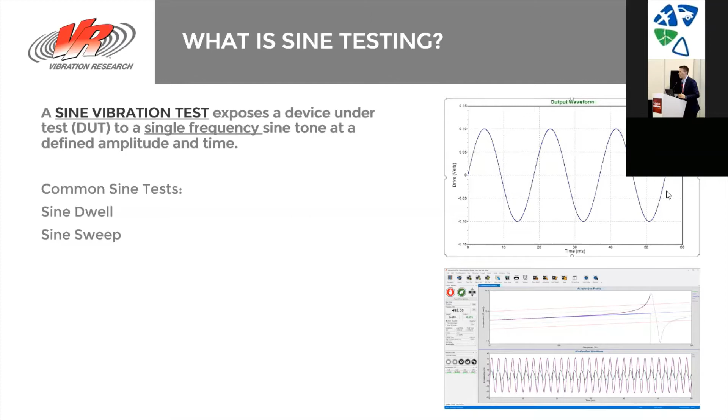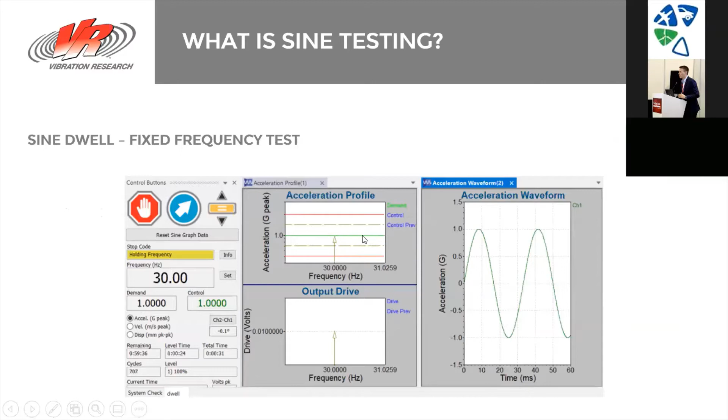Perfect. So as Leonardo explained, the sine dwell is a fixed frequency test. So here we can see we set the test to run at 30 hertz, 1 G, and so we see only one frequency. If this was a sine sweep, we would see this moving here, right? So a single sine wave at 30 hertz.

Now a sine sweep, on the other hand, we're sweeping. So what that means is we're changing frequency as we run. So for example, here, this test is running from 30 hertz up to 1,000 hertz. And the way this is set up is our control channel is channel 1, and we have either 3 different products or 1 product with 3 accelerometers. And those are what we call our response, channel 2, channel 3, channel 4.

So control and channel 1 are on this flat line, right? We've asked the shaker to run at 1 G from 30 hertz to 1,000 hertz. The response, channel 2, channel 3, channel 4, we see several different resonance points here. So channel 3 had a resonance right here somewhere around maybe 150 hertz. We see channel 2 had one up here around, I'm just going to guess, about 500 hertz, right? But what we see is that we're sweeping through, and what that allows us to do is understand the dynamics of our product.

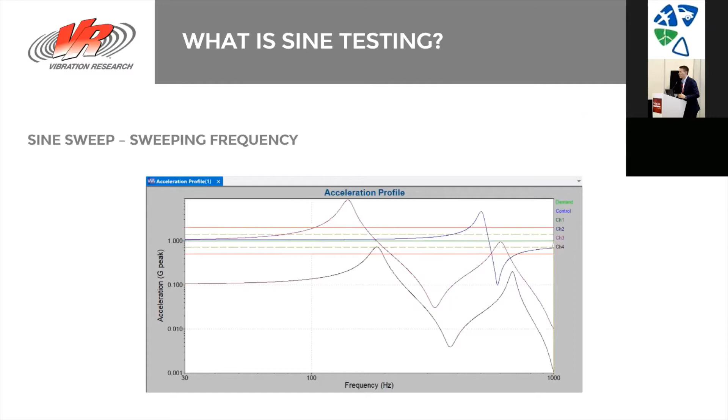So why should I use a sine test? What is the reason that we're doing sine tests? Well, the number one is what I just talked about. It's we can accurately identify resonances of a product. So for example, in this image on the right, we can see that this product has a very sharp resonance. Its first mode resonant point here is at 192.6 hertz, right?

We actually see that there's a big response. I'm not sure what type of product this is, but it's very, very sharp resonance. We have 1 G input with 100 G's output. So it's a very, very sharp resonance. But what it tells us is that if we're designing this product, right, we want to make sure that we're designing the product so that the end use environment does not excite these frequencies here, right?

So for example, maybe the end use for this product is 30 hertz to 100 hertz. In that case, most of the product's life will never experience the resonance, right? So product engineers can do this to better understand their product. Next, this can also be an effective means to bring the product to failure. So what does that mean?

Well, it means that if we define the resonance point, for example here, 192.6 hertz, we can run a test, a sine test, at that frequency, that fixed frequency, and that's going to be the most damaging test to that product, right? Because we're focusing all of the shaker's power right on that resonance. And so we can use that for a pass-fail test, or we can use it for a fatigue test.

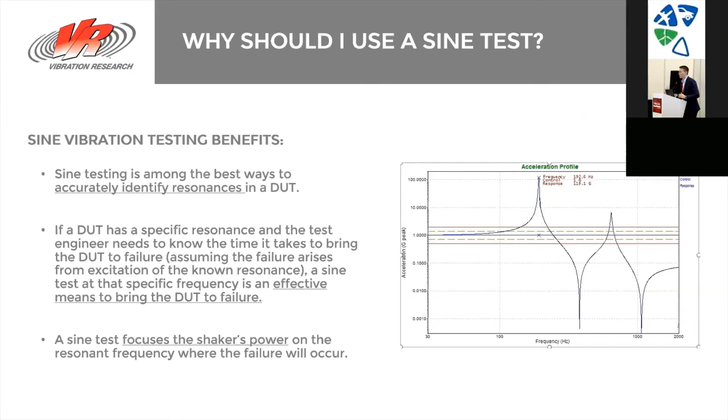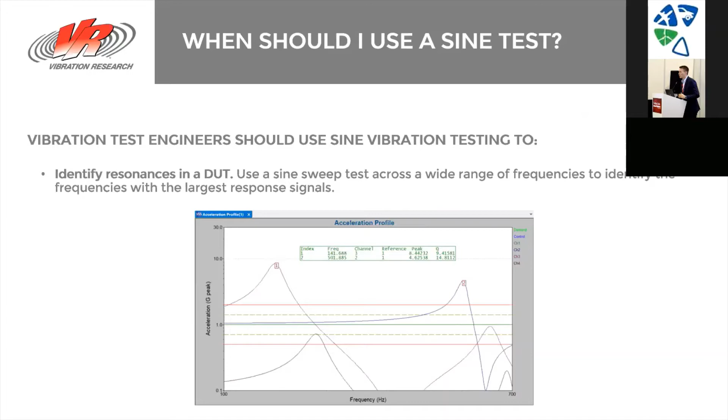Okay, so when should I use the sine test? Obviously here, as we've discussed several times, to identify resonances in a product. That's probably the #1 reason that we use sine, right? We define the response. But we can also use that as well to define or validate our shaker and our fixture. So we can potentially identify problems with our shaker, with our head expander, with our fixture to ensure that it can run the test that we want.

So one very useful tool that people can use in their lab is every year they can run a sine sweep, or they can run a sine sweep with this total harmonic distortion calculation, and they can evaluate how their shaker is reproducing a signal, right? How well is that shaker running at each frequency? Typically, we say if the shaker is above 10% THD, there may be something going wrong, or perhaps the flexures are becoming old. But it's very nice. You can overlay the past years to confirm if something is changing.

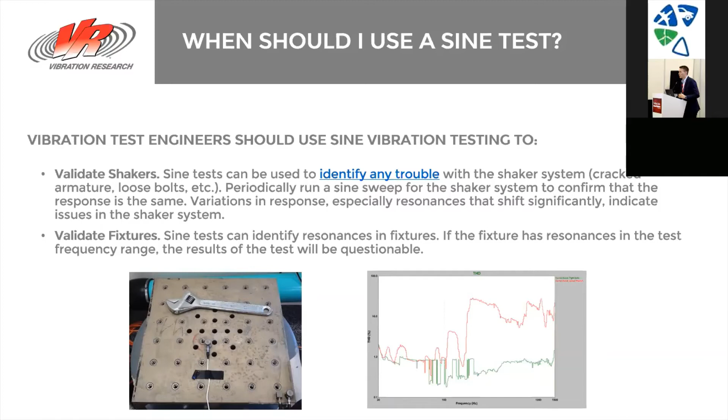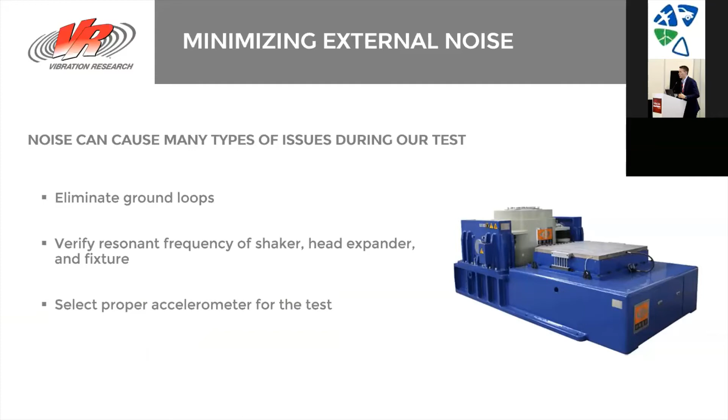So if we look at ground loops, what are ground loops? Well, in a vibration test system, we have to be careful to confirm that there is only one ground point in the system, or else we run the risk of having ground loops. So our controller, our amplifier, our shaker should all be grounded back to a single point.

When we see problems is people have the controller at some distance from the shaker and it's plugged into a different circuit, which means there's a big resistance between the ground points. And what can happen then is that there is current being pulled through your signal cables, and that shows up as noise on your test.

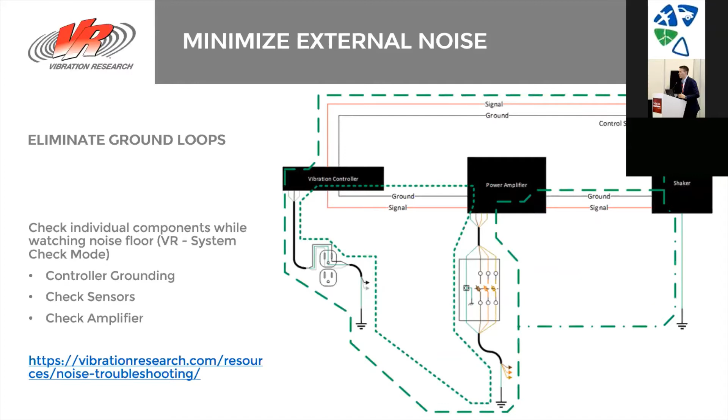Okay, we can verify the resonant frequency of the shaker, head expander, and fixture. And with this section, I would also like to answer Mr. Noriega's question. Mr. Noriega asked, can you give us more details about the test we need to run to validate the shaker or the fixture? So the most basic test we can run is a very simple sine sweep, right? And so we can mount our response accelerometers on the fixture, on the head expander, and we can understand how it responds with a simple sine sweep.

And what we can do is compare that yearly. If you have access to more advanced calculations, like total harmonic distortion, you can use that to even get a better picture of how well the shaker is reproducing the signal that you want.

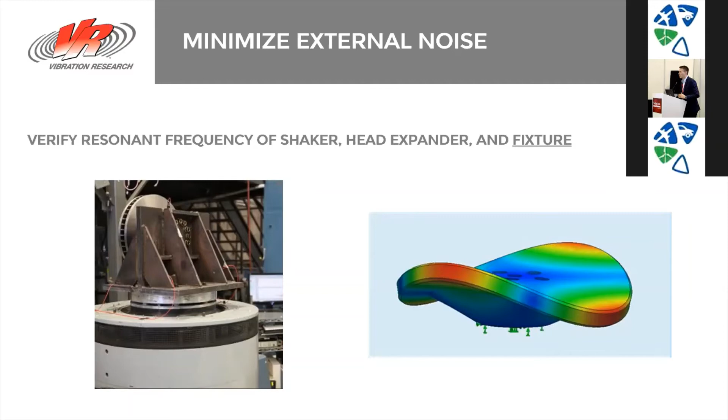Okay, and finally, it's important to select the correct accelerometer for the test, especially when we're running low-level sine tests. So if you're running 0.5 Gs, 1 G, we would recommend that you use a 100 millivolts per G or higher accelerometer. So what that means is 50 G max or less, right? A 10 millivolt per G accelerometer has a max of 500 Gs. A 100 millivolt per G accelerometer has a max of 50.

You can also prevent ground loops by using what's called an isolation base. Now, if you're having problems with a ground loop between the shaker and the controller coming through the inputs, oftentimes this is caused by a ground loop because the accelerometer is getting a ground from the shaker and the ground is not balanced.

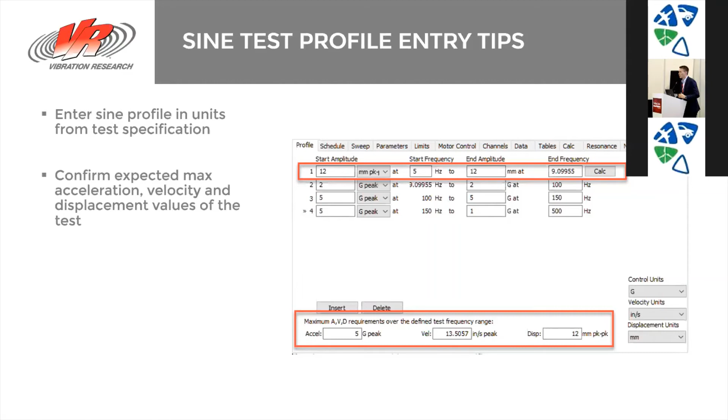Perfect. Okay. And we had a question come in here from Mr. Panchi. He asked if there's any location that we can learn about how to select the correct accelerometer. Is it located in the Shaker manual?

This, I would pass the question to the SITEC team because I know that SITEC is working with the manufacturer Dytran, and Dytran is an accelerometer manufacturer. And I know that they're going to have guides, recommendations. So if you can put in, what is this going to be used for? What is the temperature range? What is the frequency range I need? These types of things, they're going to be able to help you select that accelerometer.

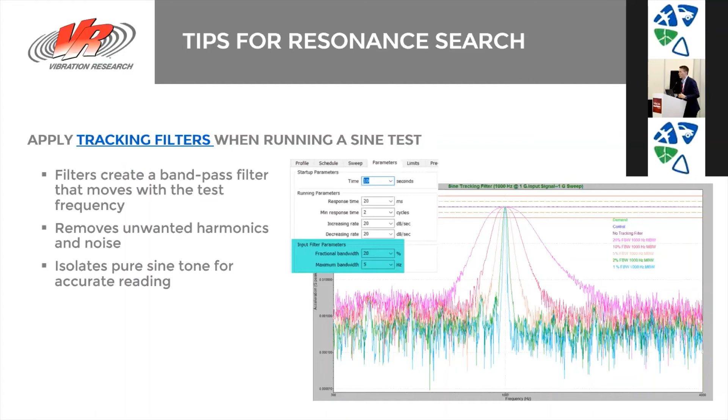Okay, next, tips for resonance dwell. So resonance dwell is when we sit at one frequency. So traditionally, there's a test called sine resonance track dwell. This is where you would run a sine test, find the resonant frequency, and run the test at that frequency. Well, there's a problem with that. The issue is that the resonant frequency changes as a product starts to fatigue, right? So in the real world, if we're trying to do a fatigue test using a dwell, if the product starts to fatigue and the resonant frequency changes, well, it's still being excited at that new frequency, right?

Because in the real world, there are many frequencies being excited at once. In our lab, we're only exciting one at a time during a sine test. So what is the solution? Well, we need to track the resonant peak instead of the frequency.

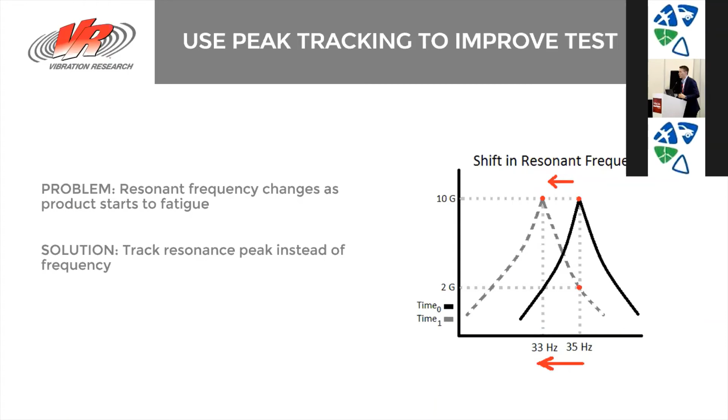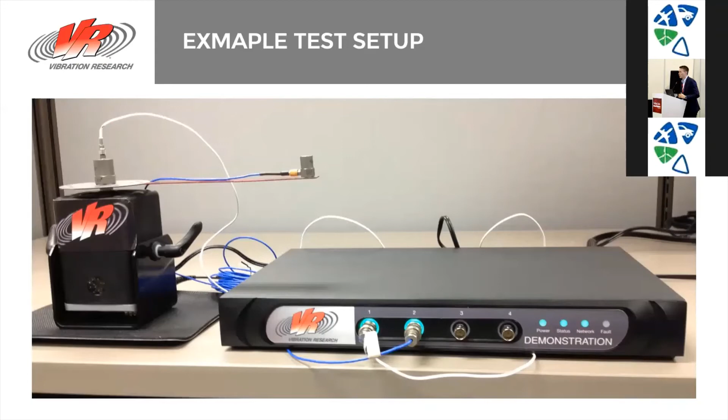So here's an example test setup. This is just a small setup, but an example for you. We have a VR controller with 2 channels, a small shaker. Channel 1 is the control accelerometer mounted in the center of the beam, and channel 2 is the response accelerometer mounted at the end.

But what is the issue with that? What are the potential issues with the traditional method of fixing one frequency? Well, as the product starts to fail, the resonant frequency can change. So if we look at the image on the right, we can see this is our original test, right? We did a sine sweep, and we found here this shape. 35 hertz was the product resonance, right?

So what we did is we set our test to run at 35 hertz, which causes the product to run at, let's say, 10 Gs during the test. That's the response. But the product starts to fatigue, and the resonant frequency shifts from 35 hertz to 33 hertz. If we're still running our original test, now that product is only being excited at 2 Gs instead of 10 Gs. But in the real world, this product would still be excited at the full peak at 33 hertz. So that's the potential issue with this.

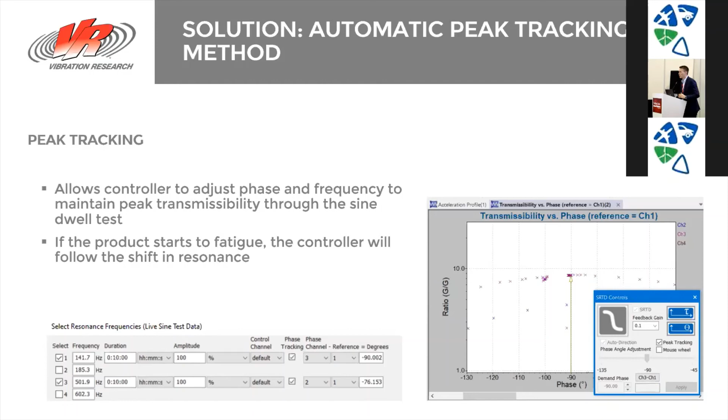And so in a minute, I'll actually open up our software and show you a little bit how we do that. I'll walk through a whole sine test and talk about some of the things that we talked about today. Okay, before I switch to the software, I just wanted to check if there are any more questions about what we talked about.

Roberto asked an interesting question here. He asked, when testing a given structure, is there always an anti-resonance between two resonances in the frequency domain? Put another way, if we see two peaks with no valley in between, will this signal that there's something wrong with the test? In my experience, I have always seen an anti-resonance.

So I would need to pass that question to our PhD and software engineer and see what he has to say. But Roberto, I should get your email, and then I'd be happy to follow up on these two questions for you. I don't know the answer to this one here.

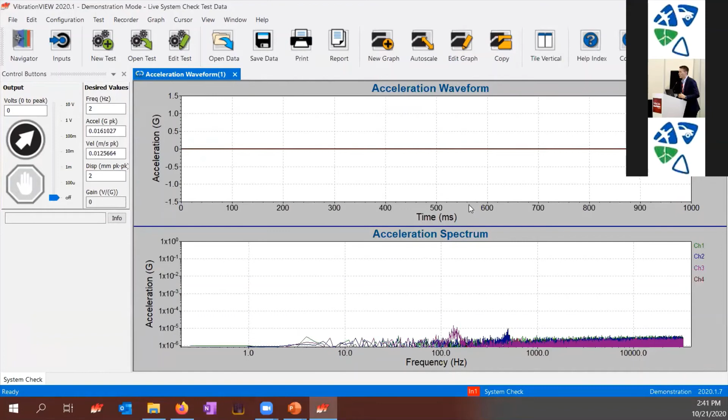Okay, so the first thing I'd like to talk about here is this system check mode. This gives you a live reading of both the frequency and the time domain. If you're doing that ground loop testing, you can come in here, because the ground loop will often show up as 60 hertz noise. So you can readjust the way you have the system grounded and see if you can lower that 60 hertz noise. That's one easy way to troubleshoot.

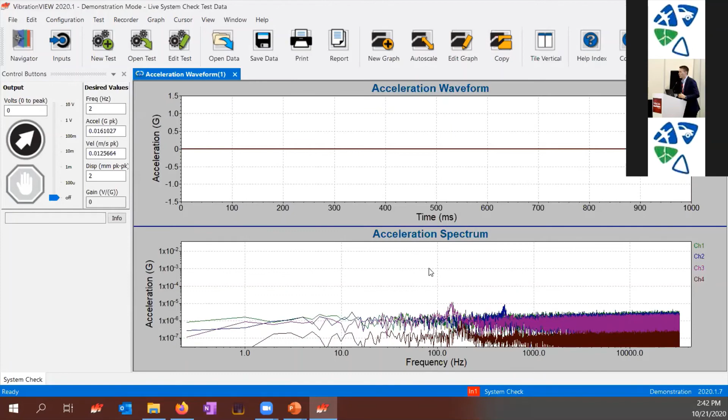Next, let's run a sine test. So I'll start a new test, sine. Actually, in this case, I can run a simple test. We're just going to run from 30 hertz up to 1,000. 1G acceleration is just fine. Now, if you remember what I said about sweep rate, we're going to be more accurate if we lower that value, but we don't want to wait here. So I'm going to increase it just so we don't have to wait.

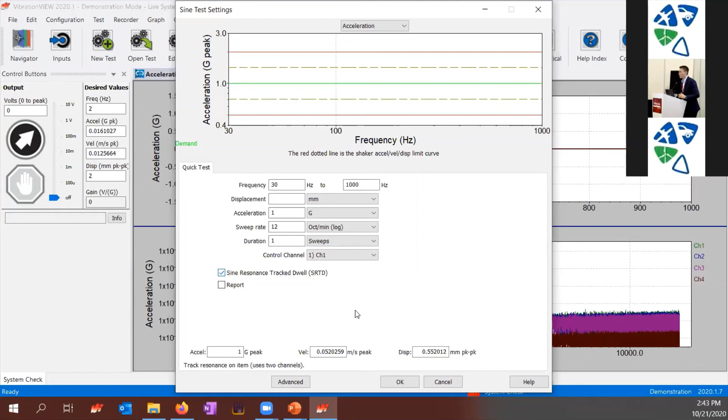We'll do one sweep. My control channel is channel 1. And then I want to turn on this sine resonance tracked dwell option. What this will do is automatically find the resonances and allow us to do that peak tracking mode that we talked about. So I'll click OK. Don't need to save the profile. I'm going to start the test, and let's add a few channels. I'll add channels 1, 2, 3, 4. I don't need the previous sweep.

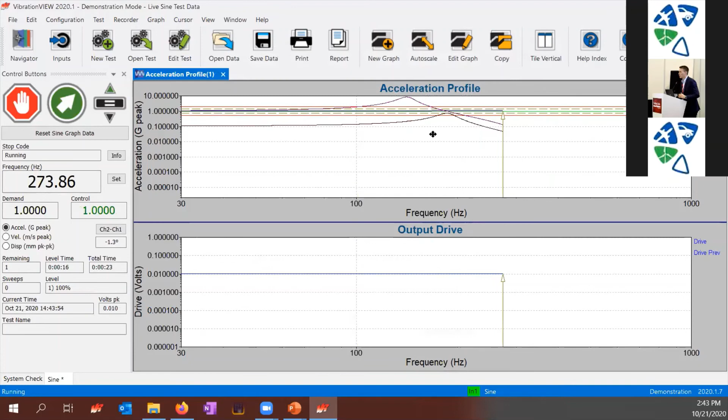So you can see we're sweeping very quickly. We can see a few resonances popping up. One thing to mention is right now I'm running this software in our demonstration mode. One thing that's very nice about VibrationVIEW is that anybody can download this software directly from our website, and you can run all the tests you'd like, all the modules, create profiles, all for free. We use it as a training tool.

So here you'll see it located 5 resonances. It found one at 141.7 hertz and another one at 501.9. In the traditional SRTD test, I would just enter how long I need to run this, maybe 1 hour or 2 hours, depending on the test specification, and I would run, right? But in our case, we want to introduce this phase control, which will allow that tracking we talked about. So I will hit run selected tones.

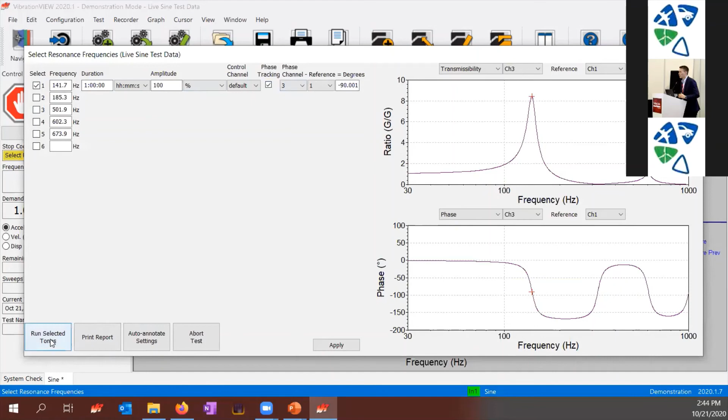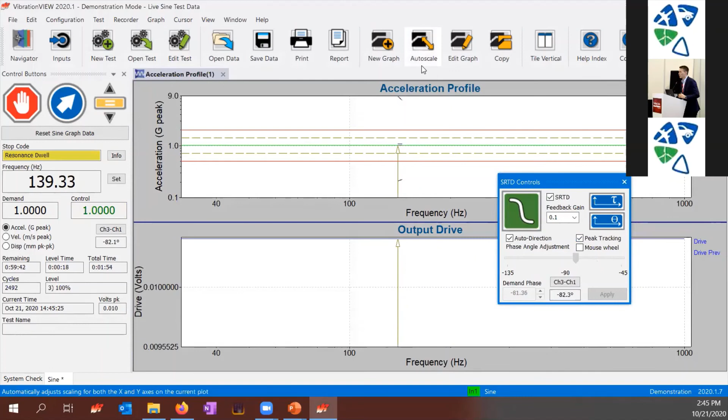Now it's automatically running at 141.69 hertz, what we expected. What it's doing is trying to maintain this phase. But we can also add this peak tracking option, which will automatically adjust to make sure that we maintain the peak. One way we can see that is by looking at this transmissibility graph. So I can add that. We can look at transmissibility, and also transmissibility versus phase, to see how the transmissibility responds as we adjust the phase and the frequency.

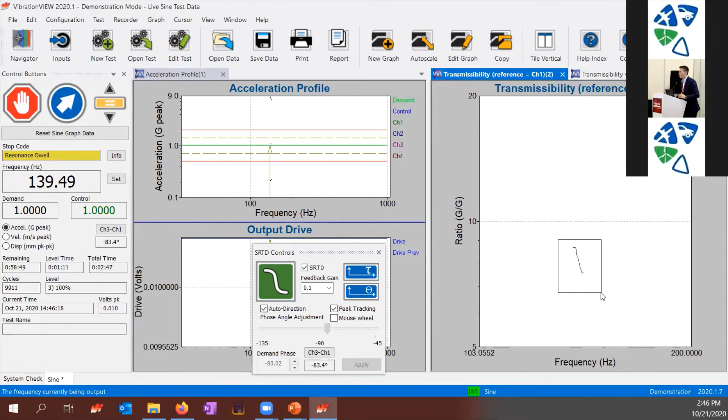So this is the automated mode, and what it's doing is cycling by slightly adjusting the frequency. I'll pull the frequency over here so we can see it. Now the frequency is fixed. Well, there it starts to go, changing little by little as it's finding the peak. We see the phase change, the frequency change, all to try to maintain the peak transmissibility of the test. So if you were running a long duration test and the resonance of your product started to shift, it would follow that. Okay.

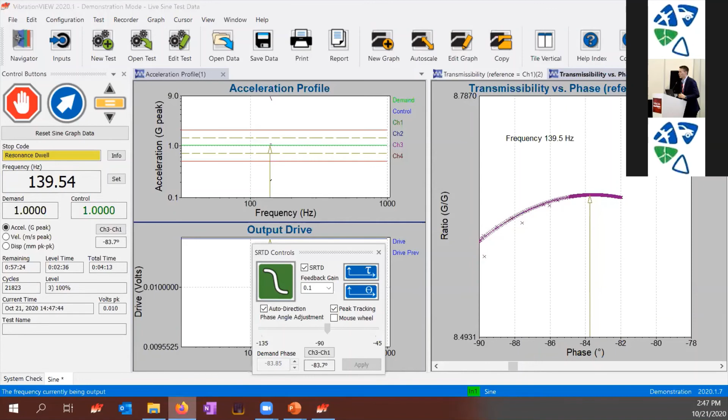Perfect. So in addition to the software, of course, I know that you're all taking this webinar, so you have interest in learning more about vibration. Every topic you can possibly imagine is available on our website. And so I just want to show you some of the resources that we have. Pretty much about 2 times a month, we'll do a live webinar. After we finish that, we'll put that information on our website for free.